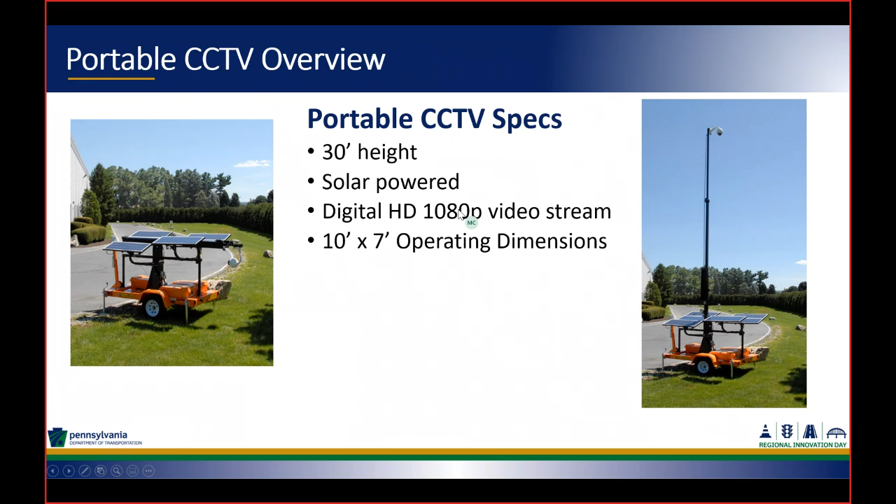Some of the applications that we have been utilizing our portable CCTVs for are key winter locations where we might have an increased crash rate during winter weather conditions, and special events, whether it be the farm show, sports show, anything where we're going to have atypical traffic and atypical conditions. Areas of safety concern: these can be utilized to monitor and see how particular areas that have a safety issue are operating on a day-to-day basis.

We utilize them also throughout our construction projects, once again just to maintain situational awareness of new traffic patterns and lane shifts, anything where we want to ensure that our traffic management center stays on top of any of the changing conditions out there on our core roadway network.

We can also deploy these out to emergency incidents. If we have bridge strikes, bridge fires, major infrastructure damage where we would want to maintain situational awareness throughout the event, these can be deployed within 2 to 3 hours, and we can have a live video stream of that area.

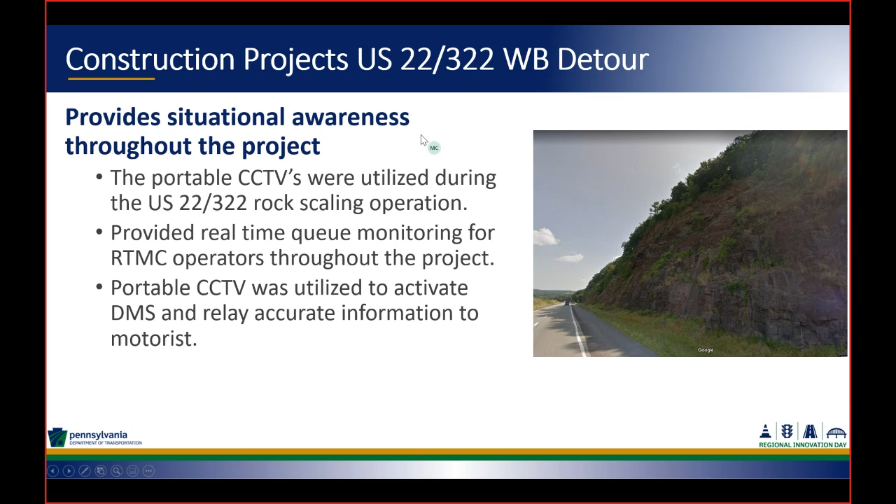I got a little click happy, but other locations that we have used this are the construction of our diverging diamonds. We have 2 different diverging diamonds being constructed in the district, and we've utilized portable cameras at both those locations to, like I said, maintain situational awareness.

And whenever you have pretty complicated lane shifts and a construction schedule, it's nice to be able to relay all that information to motorists via our DMS and keep that real-time awareness of those diverging diamonds, and ensure that they're operating efficiently and we have no operational issues.

District 2 also utilized portable CCTVs; they actually retrofitted some highway advisory radio trailers. And once again, these came in at roughly $12,000 a piece. They were utilized throughout the Potters Mills construction project up in Seven Mountains. It's pretty big construction, but it provided our central region with real-time information throughout the entirety of that project in District 2.

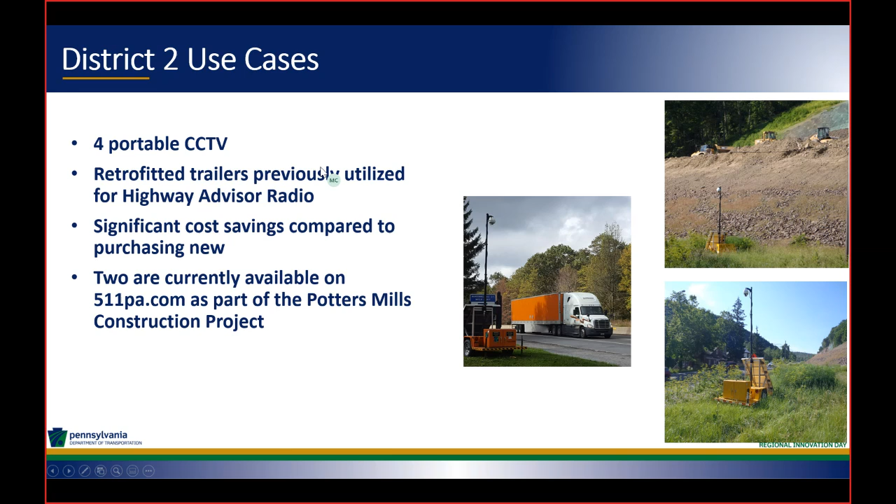All right, and this is something new that actually came up in, I'd say, the last month since I started making this presentation for this innovation. We actually started to utilize Microsoft Teams to share videos right back to our TMC operations. We've been in a remote capacity since March, and we started utilizing Teams. And one of the things that we found we could use is the video feature on Teams.

Our District 8 has 2 district incident response units that respond to high impact incidents throughout the district, and our team can actually use these to show up on scene and relay information as well as share video of the actual incident scene, so you can get real-time information from our teams out there. And this is relayed back to our traffic management center. We've only got to utilize it twice so far during actual incidents, and it's worked pretty flawlessly both times.

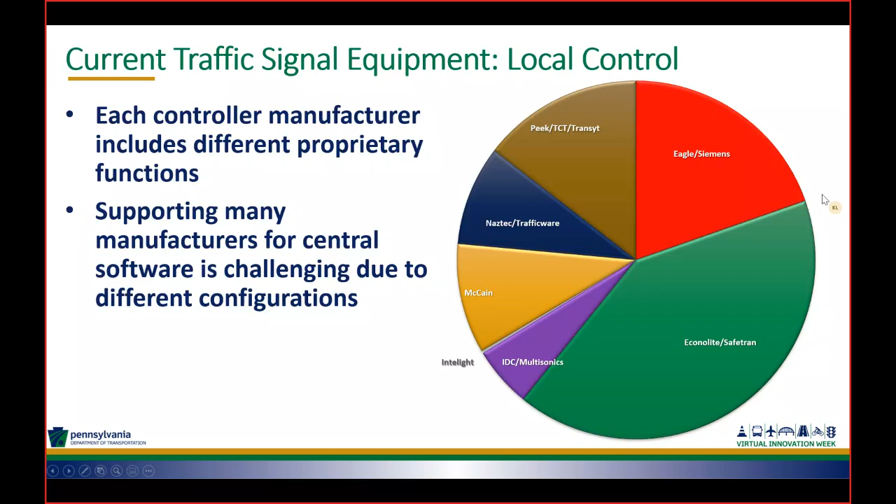Each brand of controller requires a different software client in order to remotely monitor them. They are not compatible with each other. Many software packages are older and no longer supported by manufacturers. Some of the software is incompatible with current operating systems.

To solve this problem, PennDOT put out a proposal for a uniform command and control software, with the goal being that we have one software that all the signals are compatible with. The unified command and control that was selected is Maxview. And now I'm going to turn it over to Ted and let him show you a little bit more about Maxview.

Thanks, Kevin. Good afternoon. My name is Ted Lucas. I'm a consultant at PennDOT District 6. In District 6, there are over 1,500 signals connected back to the district office. I've been involved with monitoring traffic signal communications and operations for about 6 years now. And now let's take a look at Maxview.

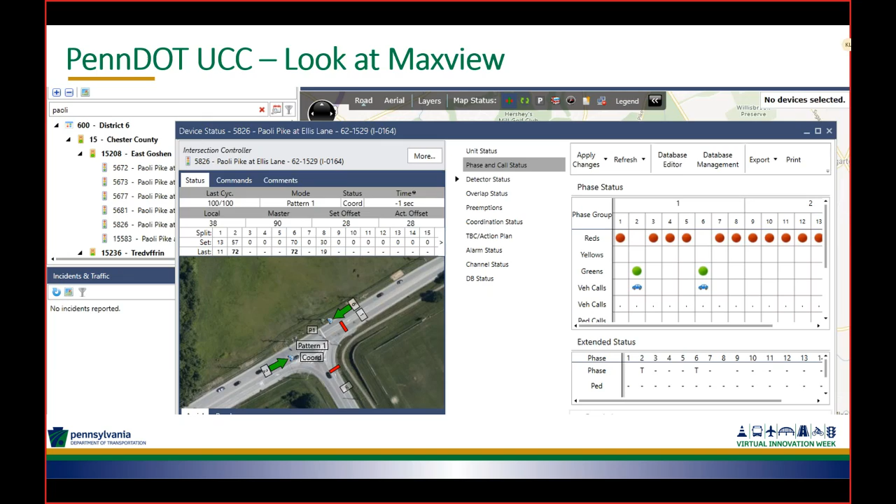Maxview is a web-based software which has the option to download a local version of Maxview. An advantage of this local version is that it has map layers not available on the web version. Bing Maps with traffic and PennDOT Fiber Map overlay are examples of these. The user has the ability to update their local version. They would need to do this when the Maxview server is updated.

Maxview is available to all districts in PennDOT. 5 districts currently have signals polling in Maxview: Districts 2, 6, 8, 9, and 11, indicated by the triangles to the left of those districts. In total, 500 signals are integrated into Maxview. And now on to District 6.

In District 6, 4 of the 5 counties have signals polling in Maxview. Philadelphia manages their own signals in their KITS system. Currently, 343 signals are integrated, 68 are polling, with 275 awaiting transition from Centracs, the Econolite software. Econolite controllers can be polled right into Maxview, and we're working with the townships and municipalities to get access to the PennDOT network and to Maxview to get them polling.

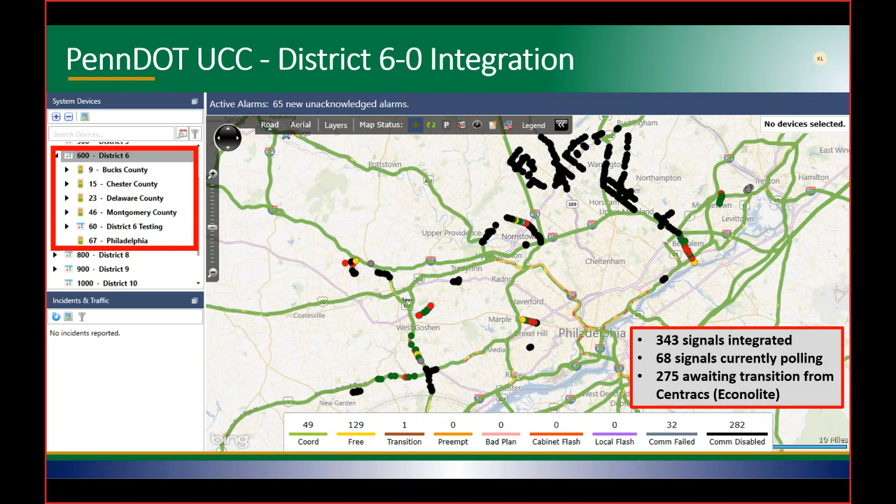The ability to add links is a key feature of Maxview that we really like. In this example, we have the links to the external camera detection shown on the right. These links are directly associated with each intersection. Other links that can be added are camera detection for GridSmart cameras, radar for Wavetronix, and also we can add directly to these external links adaptive systems such as Rhythm and SurTrac.

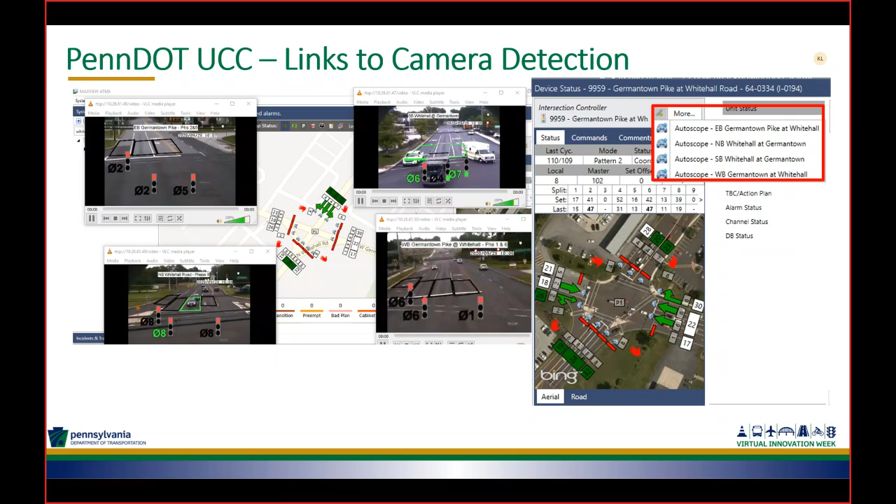Device status: this shows all the intersections currently integrated into Maxview. This is a good way to troubleshoot a corridor. You can drill down to the township or townships that the corridor is in and then filter down to the corridor name. And it gives you an overall look at the status of the intersections, what patterns they're running. And it's a good tool in troubleshooting and a quick overview of what a corridor is doing.

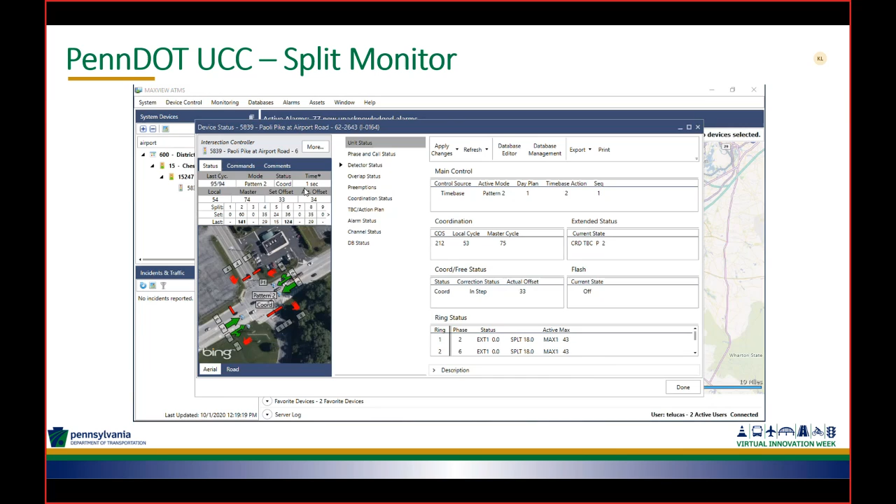Split monitor feature. This is a very good feature that we like to use when troubleshooting complaints such as, sat at an intersection for 5 minutes and never got a green light, or it's skipping certain phases. So here you can drill down to a time period, go back in time, and then as it pulls up this data, what you can do here is you're adjusting the time period a little more.

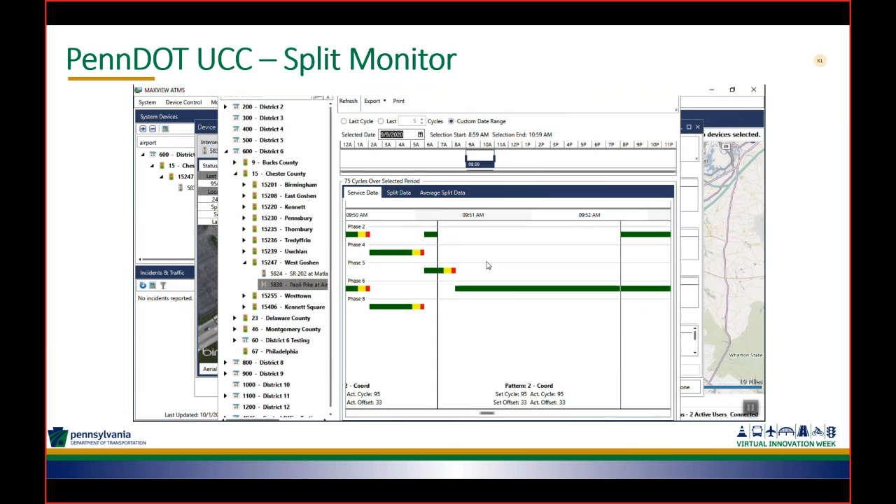But it'll come up with data, and here in this first tab you can scroll to the left or to the right and quickly look, see if every phase is getting served. So it looks like everything's getting served. Then you can go to the individual split tab, take a look at what individual splits look like, and then the overall average split data. You can look at that, and indeed that phase 5 is being served.

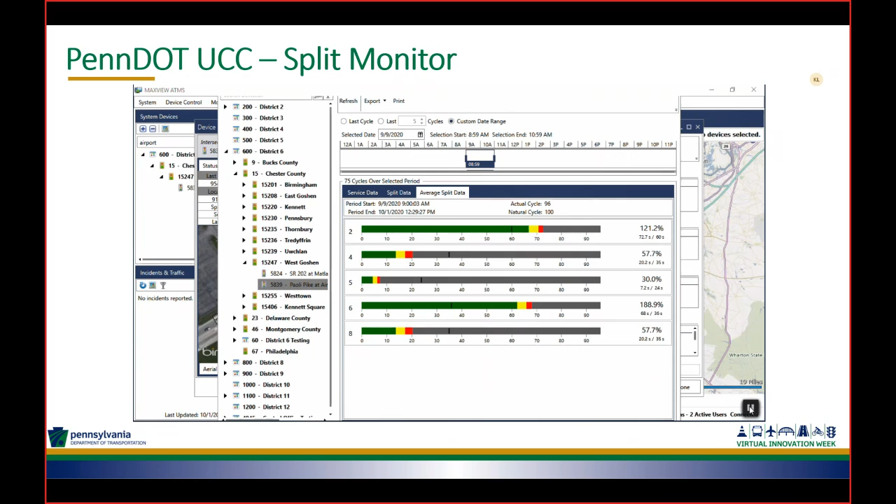Another feature of Maxview is the incident management.

Maxview is tied to the OpenTMS software that they use in the District 6 Regional Traffic Management Center. In this, there's a signals module which operators can access. If they need to change timings on a corridor, they can activate action sets that are set up in Maxview and implement a diversion timing if they want to reroute traffic off a major interstate to an arterial. They can change the timings and monitor them in this OpenTMS, and all these changes take effect and are shown in the Maxview software.

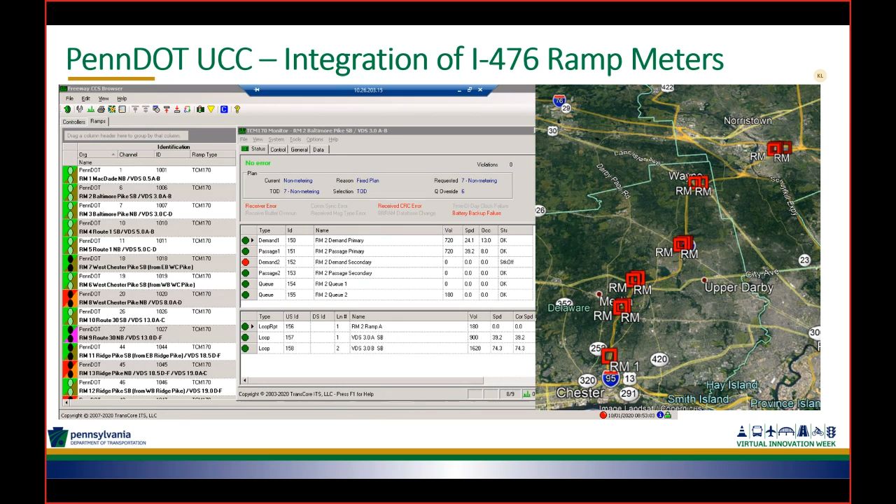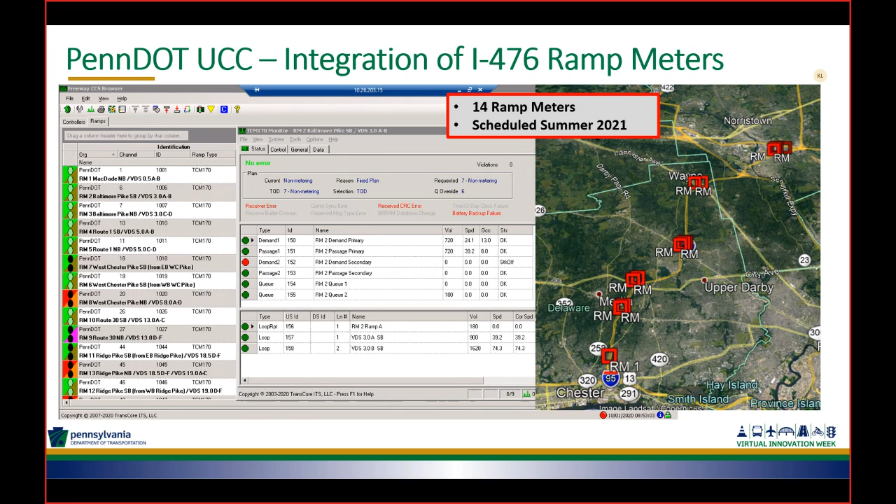What we're looking forward to is the integration of ramp meters. We have ramp meters on I-476, commonly referred to as the Blue Route. It runs from I-95 to the Turnpike. There are 14 ramp meters that are scheduled to be updated and integrated into Maxview. To the left is the TransCore software, which is connected to a serial system, and this upgrade getting to Ethernet-based IP will be a nice addition to Maxview. This is scheduled for summer of 2021. Again, looking forward to that.

Another feature of Maxview that is nice to have is the automated traffic signal performance measures. Here's showing a split monitor, and we're currently working on getting the detection set up on the intersections that we pulled in, get it configured so we can utilize this report.

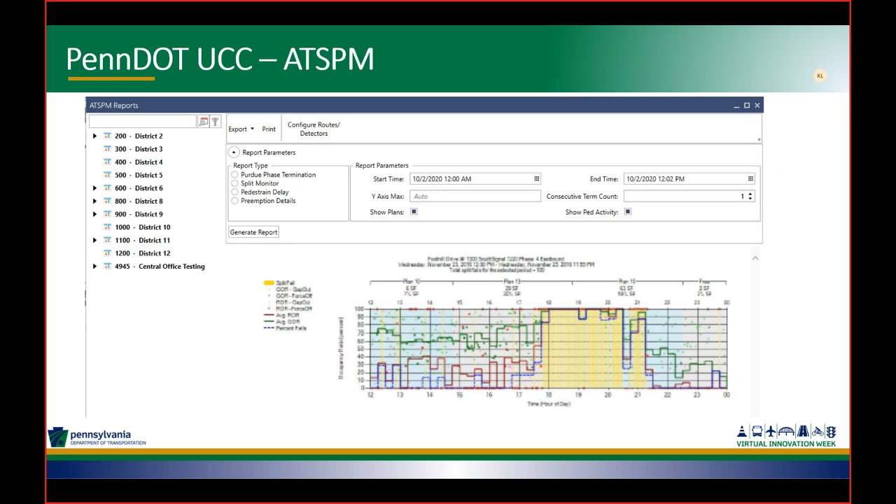And now back to Kevin.

Thanks, Ted. So I'm going to go over some of the benefits of the Maxview software. Obviously, there's only one software interface to learn, so people will use it every day and they'll become more efficient at doing their job. For certain corridors, the brand of controller may change from township to township, which the old way meant possibly multiple software for the same road. With the UCC software, you can just do it from one computer. It would also make implementing incident management plans much easier if the need should arise.

It allows for the projects to be open bid, which allows for competitive pricing. Before, when the controllers were proprietary, they would often have inflated prices. We have special provisions now requiring that the controllers be UCC compatible. And Maxview has also already been successfully deployed in other states, so we get the benefit of having additional features that were requested by other states that were developed.

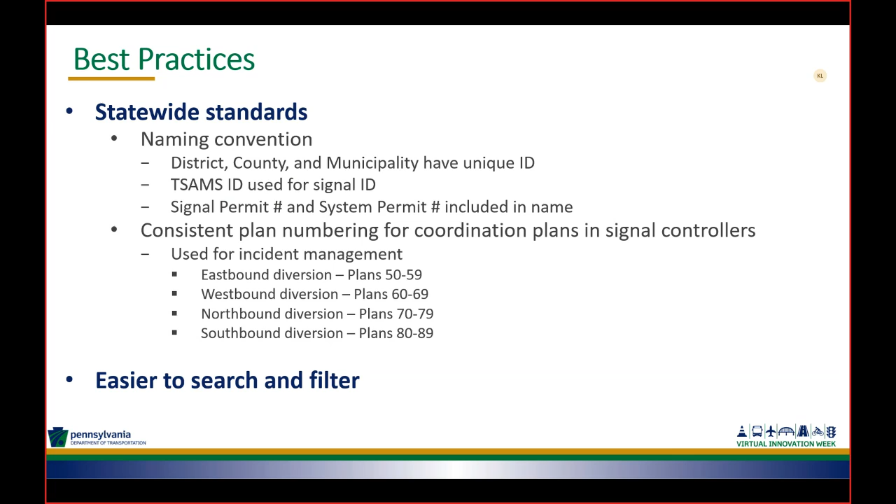Another standard was the plan numbering for coordination plans in signal controllers that we use for incident management. We set these ranges aside for, as you can see, any eastbound diversion would be plan 50 to 59. Coming up with standards makes the system easier to work with, Maxview, and overall a good experience.

And some of the lessons learned, the one major lesson we learned was working with signals contractors. I got a call from a signal contractor and he said, I can't add intersections to Maxview. A little troubleshooting showed that it was only admin level users that could add intersections. So the short-term solution is the shell data, the base data for the intersections. We'll add the intersection location and the shell data, and then we'll allow the vendors to edit their intersections. And we hope to have this updated in a future enhancement.

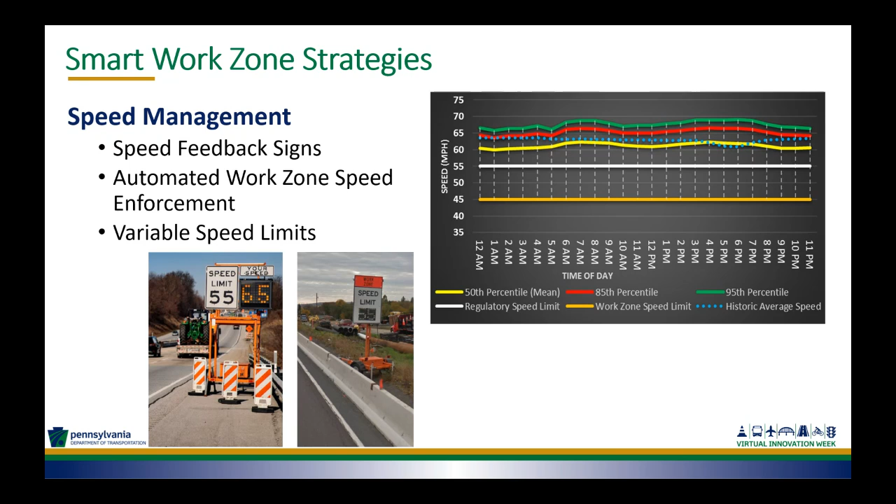The next strategy that I would like to discuss, and Danielle, I'm not being able to advance my slide here.

Oh, there we go. Traveler information. So traveler information essentially is a deployment of devices that tells the road users what to expect as they are either approaching or traveling through a work zone. Last year during Innovations Day, I spoke about travel times in work zones, and particularly about a project deployed in District 2 on North Atherton Street, where message boards were utilized to tell motorists what they could expect entering the work zone and how long it would take to get to a specific point within or beyond the work zone. And that's essentially what travel time information would be for a road user.

We see them all the time when there's no work happening, as the TSMO people under Ryan Mcnary's supervision already do this under normal circumstances. If you're traveling through, say, the Interstate 80 corridor, they give a destination point to the road users and tell them how long it's going to take them to get to that point. Well, we can do that in work zones now too. On this particular project, they retrofitted the contractor's message boards with a modem and other hardware and software that connected to the ATMS software being utilized in the TMC, and they can monitor that. And the same thing with queue warning systems.

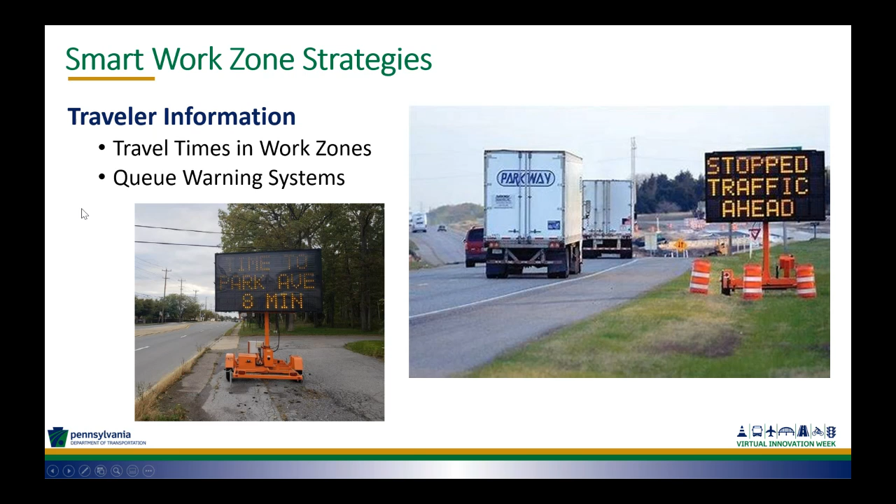Exposure reduction. So anyone working out on their roadways, obviously they want to be safe, and they certainly want to feel safe while they're out there. In a realistic or an ideal situation, positive protection is always the best scenario to protect workers from oncoming traffic in the event there is an intrusion in the work zone.

Unfortunately, some work activities aren't really conducive to setting barrier out, because maybe it's just simply doing a crack sealing job, doing a small bridge patch or a pavement patch on the roadway, or you're on a corridor that you can only close a lane maybe during nighttime hours, but it has to be open the very next morning because traffic volumes just don't allow a long-term lane closure. There are options out there that we can be deploying that will reduce the exposure to workers to oncoming traffic, and still allow that mobility to happen.

Up on the top right photo there is a photo of a movable barrier system. On a permanent situation, movable barrier systems have been deployed out on the Ben Franklin Bridge as well as the Walt Whitman Bridge in the Philadelphia region. So if you're familiar with that area, certainly you're familiar with how they manage their travel lanes during peak volume times at certain points of the day, when they need to switch the number of lanes going inbound versus outbound. But this type of deployment can also be utilized in work zones.

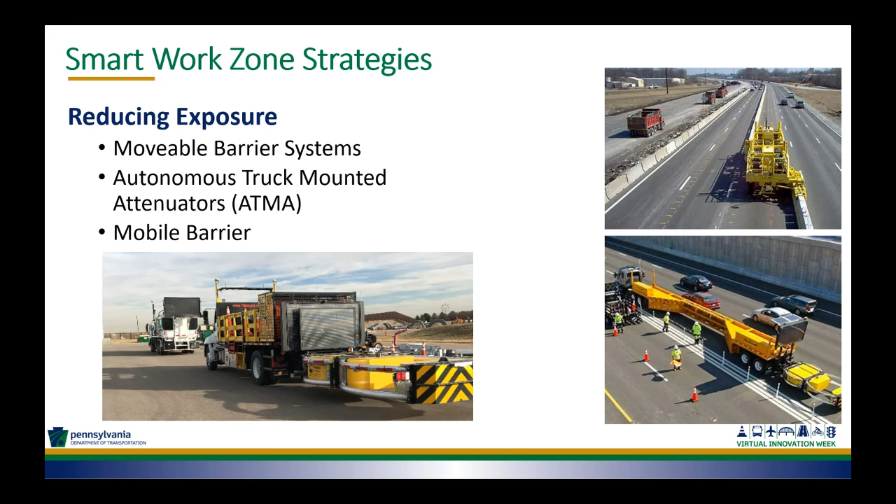Next, please, Danielle.

And then managing traffic and performance. A couple of these principles aren't necessarily new. The late merge utilizes the sign that says use both lanes to merge point. We talked about a little of this last year during Innovations Day. A couple of districts are deploying this principle on multi-lane roadways with a high amount of congestion and slower traffic, and they're trying to minimize the length of the queue that develops leading into the work zone. Encouraging road users to use both lanes encourages that reduced queue length, and it works well in suburban and urbanized areas. It may not be the best practice in a rural setting. That doesn't mean you can't experiment with it, but experience typically shows that this type of work zone doesn't necessarily work well in a rural setting.

But the dynamic lane merge is basically taking the hybrid of the late merge concept and marrying it to a standard work zone where you're just doing a traditional lane closure. Rather than static signs, it utilizes message boards. Similar to what I talked about earlier with the traveler information and queue warning systems, taking either data feeds or sensors along the roadway, it detects traffic behavior and adjusts the type of lane merge based on that. So if congestion is beginning to build, it can go from the standard lane merge signing to late merge signing, so it can better manage the congestion and queuing coming into the work zone.

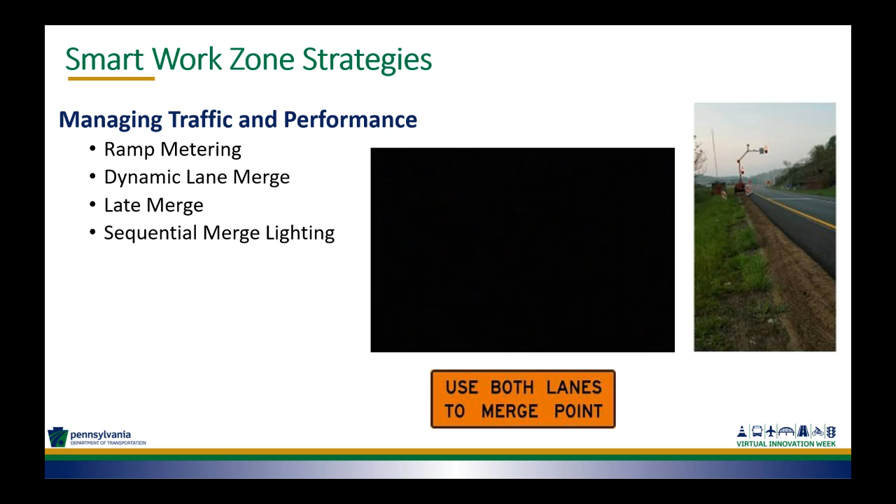And then lastly, I'm going to talk about performance monitoring. I talked a little bit about this last year, but we have several traffic or transportation management centers across the Commonwealth that monitor how traffic is behaving on our core roadway network, and work zones are no exception to that. The folks that work in these centers are very interested in how well work zones are behaving.

So with the partnerships that I mentioned before, through Waze, INRIX, Google, and anybody else that we have partnerships with, they can take that data feed and help monitor how work zones are performing. It also helps in the decision making moving forward on when the best times are to allow a lane restriction on a roadway or not allow a lane restriction on a highway.

As we take that data feed, COVID changed things earlier in the spring of this year. Now, not to take away from what Ryan may be talking about next, but I'm sure he's got some information regarding how traffic has rebounded since then. But having these traffic management centers and monitoring can help enhance the performance of a work zone through these data feeds. And obviously we're pushing information out.

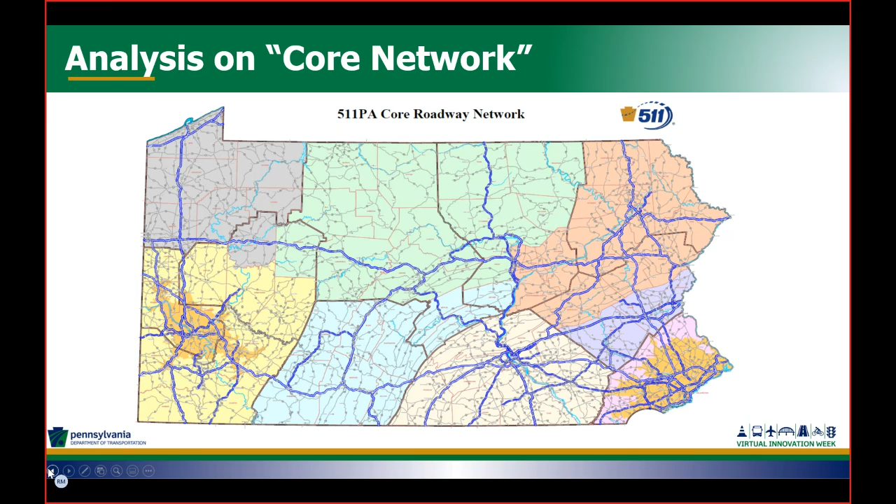There we go. As I'm setting this up, keep in mind all the data that you're going to see is specific to the blue routes on the map. We consider that our core roadway network, and I think you heard Matt say that in the first presentation. Those are all the routes on 511. If you went to 511pa.com right now, or you called in, you could get a traffic report. These are the same routes: your major interstates and major arterials throughout the state. So it's roughly 4,000 miles, 10% of what PennDOT owns and operates. PennDOT owns and operates roughly 40,000 miles in the state. So all the data you're going to see takes place on these core routes.

Going forward, our data program, the TSMO Performance Program, has approximately 40 terabytes of data that have been correlated to different crowdsourced data sources like Waze and INRIX. We use Power BI, a Microsoft product. We have our crash records, so those are police reports. We have our incident management system, which is the road condition reporting system, and our RWIS stations for the weather, roughly 40 or 50 throughout the state. Our maintenance database to understand where PennDOT teams are out there, our traffic counters, weigh-in-motion permanent sites and some temporary sites as well. And then we have our ATMS DMS message history.

This is all linked locationally, so we can tell where incidents are happening via Waze, and where there's slowdowns with the speed data from INRIX. And then we can understand the crashes and the conditions on the roadway at the same time. So that's a little background, but we started this process of the TSMO Performance Program by understanding crowdsource incidents. Is Waze good data?

You know, there's a lot of people out there that just simply say there's a crash right here. Well, let's validate that. So what we did is we linked it to our crash database, and it came to the conclusion that around 87% of INRIX and Waze combined detect reportable crashes.

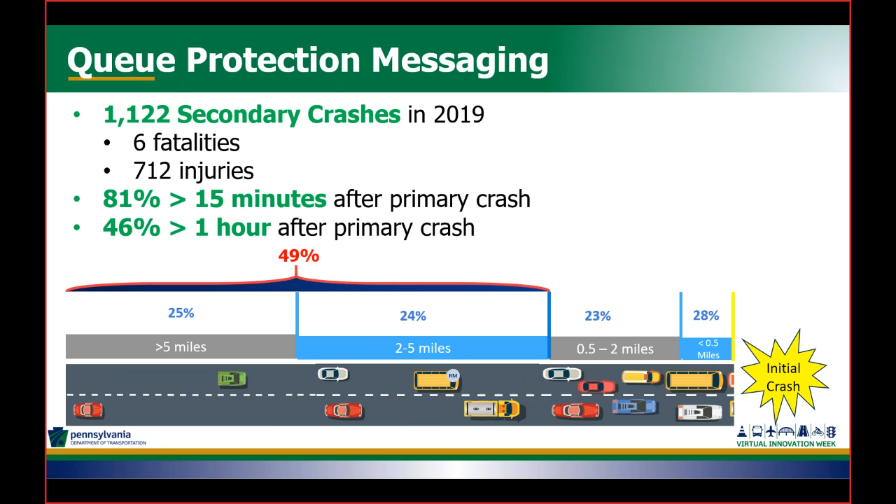And why that's important, to put it into perspective, like I alluded to, is the hills, the sight distances, the curves, and things along those lines, where we need to understand what our roads were like out there. So we're working on some data sets on that, but that is one thing we investigated for secondary crashes. Now, this is not directly related to a solution that is more tangible with the brick and mortar infrastructure, but this is a virtual solution that we'd like to consider going forward. And we're having this developed by our 511 PA vendor right now.

So highway advisory radios, they're the beacons that you see flashing. We call them wigwags that say tune to 580 AM for an urgent Penndot alert. Sometimes they don't work very well. Sometimes you can't hear them, and you can only hear them for about a mile. But it's a great use case.

It offers our operators in our TMCs the ability to write a message, and then it gets converted from text to voice, and people can hear it out there over their AM radio. And it's one of the only things where we're not limited to characters as severely as we are on our dynamic message boards.

So what we came up with to try to facilitate that use case was, okay, we have this ability, we have this call-in 511 system. Why don't we link the 511 system, the app, the website, the call-in aspect, to kind of replicate what HARs were intended to do? So we worked on this. We kind of pitched the idea to our team.

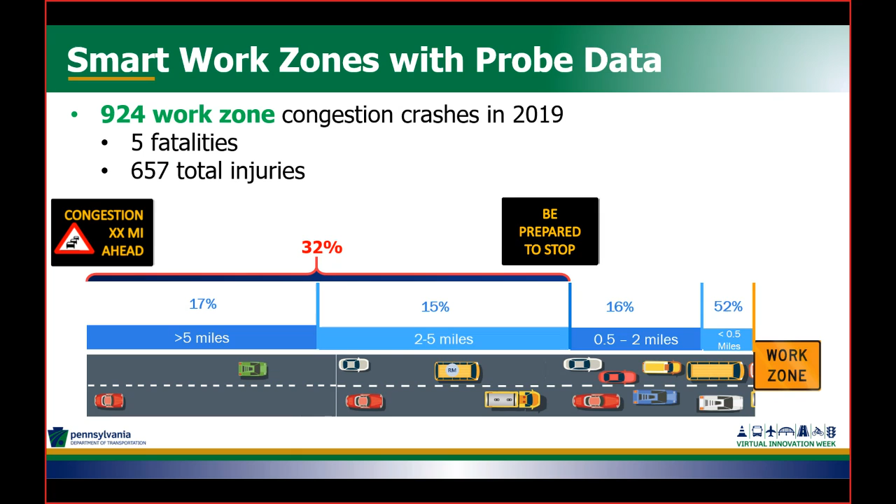But these messages are actually taken from the I-76 project, so they were designed for that. And they're going to be deployed here hopefully this winter on some projects. We are piloting this on I-78 this winter as well, and potentially on I-83 coming up I-83 north from the York area.

But like I said, we're one of the first in the nation to do this. There's a lot of people that have been trying to do this for around 15 years. But one thing that really helped us was our correlation to that crowdsource incident data. We had approximately 20 to 25% unknowns before we brought in Waze and INRIX and different incident APIs. So we know from the PennDOT perspective, we don't get all of the incidents that impact our road. But by the grouping of this other information, it gives us the ability to learn what the causes of congestion are on our roads.

That is immense when it comes to planning, because what are we always trying to reduce? We're trying to reduce people sitting in queues, wearing down roads, having traffic. We want people to move from their starting point to their destination effectively, whether it's commerce or public in general. So we realize a lot of them are self-inflicted road work, but it has to happen from time to time. But this gives us the ability to scale it down.

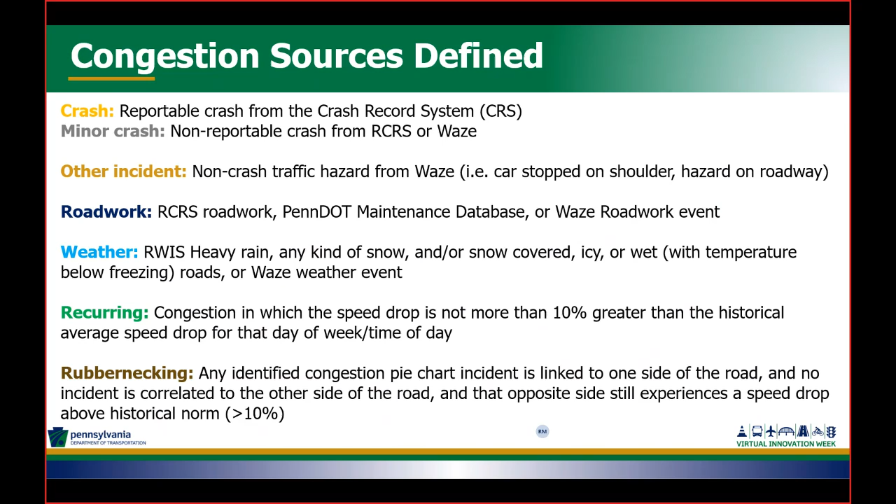If you want more information on the methodology for this, or if you're interested more, you can Google PennDOT TSMO, and it's all listed out there in 2 pages on our performance report that we released in January 2020.

So getting into COVID-19, maybe you've heard some conversations on the traffic volume drops, or read some news articles, but I'm going to relate this to the DOT perspective. I'll give you a little more information as it impacts everybody and relative to some other things that it affects outside the DOT.

So as we all know from the Pennsylvania perspective, back in March, we had non-essential business closures, non-life sustaining business closures, and then a stay-at-home order. So this caused a major downturn in everybody traveling, rightly so. So this also impacted Waze crashes. Approximately 88% of Waze crashes actually decreased during those months where everybody was more staying at home. But this gave us an insight. So whenever there's a drastic change like that, it gives you an insight to actually reevaluate your business practices.

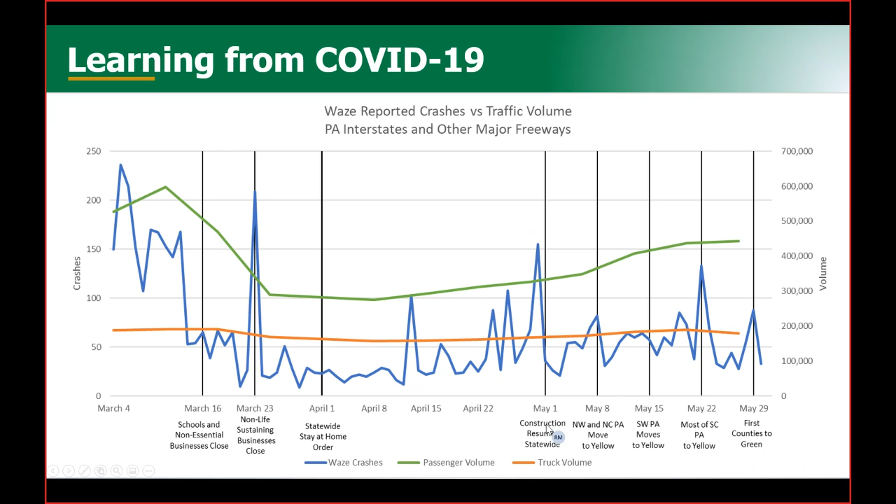So what we wanted to look into is, okay, back in March, we had a cease and desist on all PennDOT construction. We know from the PennDOT construction perspective that it's been exclaimed from our TMC managers that our policy and the way it's called into our TMCs 15 minutes beforehand is very intrusive to their daily business. And they can't work on multiple calls, and if they have an incident going on in rush hour, etc. So construction resumed May 1.

Oh, I always get ahead of myself on this. I'm sorry. So construction resumed on May 1, and I'll pick back up there.

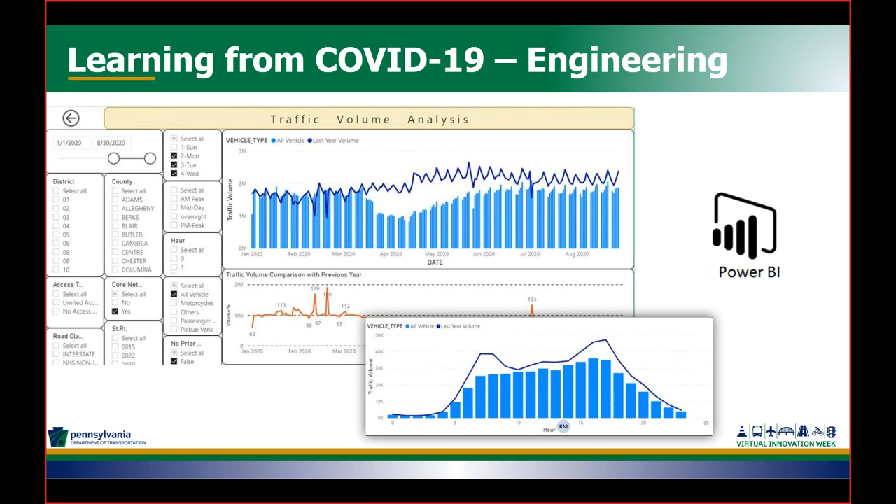But what you're seeing here is a tool that we developed with the Bureau of Planning and Research that we hope to make available sometime soon. This gives you the availability to look at the traffic volumes by day of week and certain hours of the day, so you can understand the traffic differences, and you can compare that to the 2019 data. So we've seen, in the height of this back in April, 50 to 60% drops in traffic volumes throughout April on some of our major corridors, for example, on I-83. So this is something that we hope to have coming soon to our engineering districts, so that they can look at.

But getting back to what I was talking about, sorry about that. I should probably switch the order.

But after that 88% drop and construction went away, we saw a significant increase in the amount of verified Waze crashes that we were receiving from our operators. Approximately, I think it was around 58% on average, that the amount of crashes that came in were then verified through a PennDOT database. After construction resumed, we went back to slightly higher, approximately around 30% of the Waze crashes.